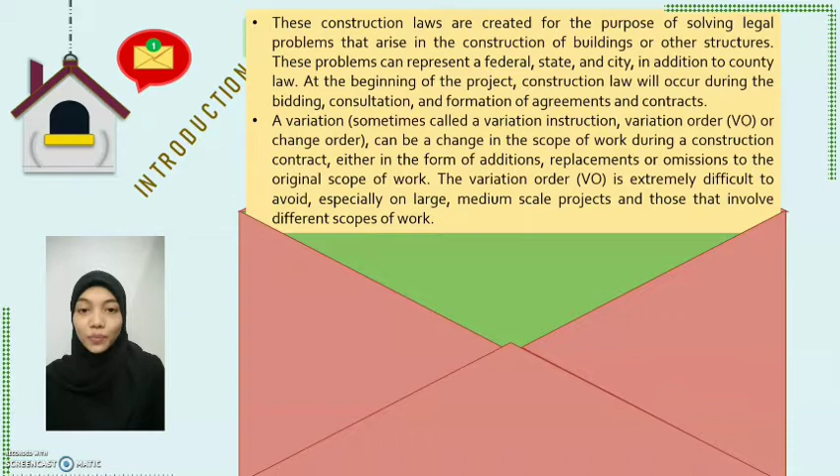Today I am going to present our group assignment related to the topic of variation order. Here I will explain a little about the definition of variation order, types of variation order, and issue of variation order. So firstly, the definition of variation order.

Variation order is a change in the scope of work in a construction contract in the form of addition, omission, or replacement of the original scope of work. Variation order is issued by the company to the contractor as an instruction to change the scope of contract work. Variation can also vary whether an increase or decrease in volume, type, quality, or execution of work schedule.

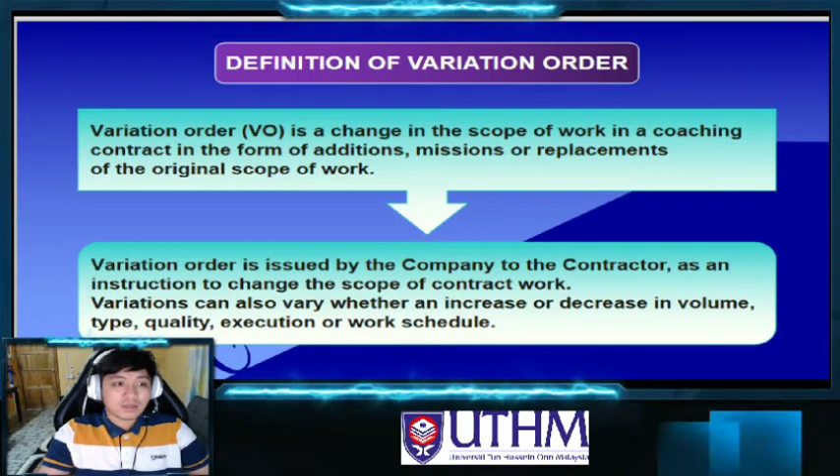So next we go to the types of variation order. Type of variation order, we have 5 types.

So first is change in the manner and method or material to be installed. This often happens in construction where the contract states the material used and the method of installation to be done. However, due to the variation order, this change occurs. This can affect the cost and time of a construction and affect the customer.

So next is different or unexpected site condition that were not imagined in the original contract price. This happens when a customer makes an appointment with a contractor based on a company website which specifies the price and fees to be set on the website. But it happens when the contract agreed between the contractor and customer is not in line with that on the website. This causes the customer to spend more.

So next is modification that changes the sequence of planned work as originally imagined. This change often occurs when an unexpected thing or problem occurs where the contractor has changed the previous planned sequence of work to a new sequence to avoid delay in the construction project.

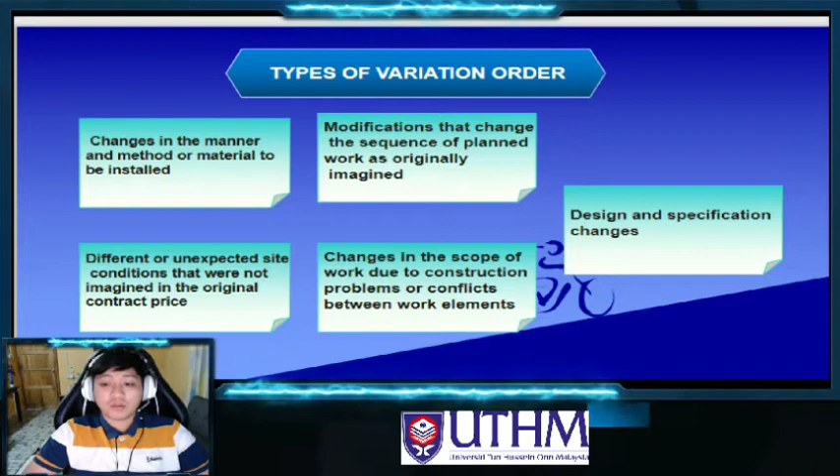So lastly is design and specification change. Change to plan and specification occurs when a customer wants to change the specification of a project, which will involve change to the plan that had been set by the contractor previously.

So lastly is issue of variation order. We have two issues. First is direct variation. A direct variation is issued once the owner specifically directs the contractor to create a modification.

So second is constructive variation. On the other hand, this occurs as a result of a non-owner directed event that implicitly necessitated a variation. That's all from me.

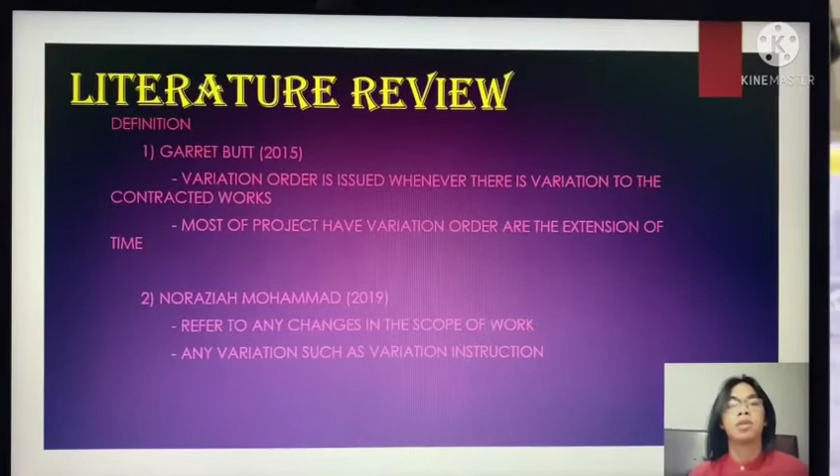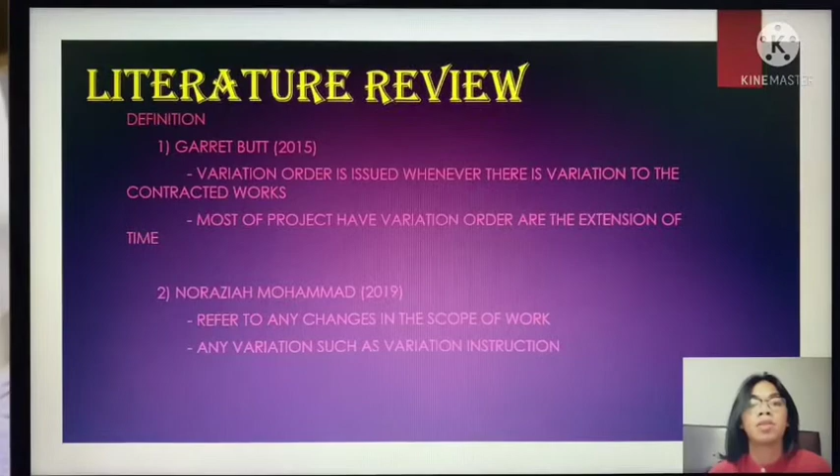First I will talk about the definition of variation order from the literature review. Garret Butt 2015 said that variation order is issued whenever there is variation to the contract works. Most project variation orders are the extension of time. Number 2 is Noraziah Mohammad 2019. She said that variation order refers to any change in the scope of work. Any variation, such as variation instruction, is a modified contract document.

Okay, next we will move to the types of variation order in construction. This type can be seen through the scope of work. There are five types that I stated in this slide, which is first, change in means and method or materials.

Number 2 is change in plan and specification. Number 3, correction made due to error or omission. Number 4, owner financial problems. Number 5, conflicts among contract documents. That's all from me.

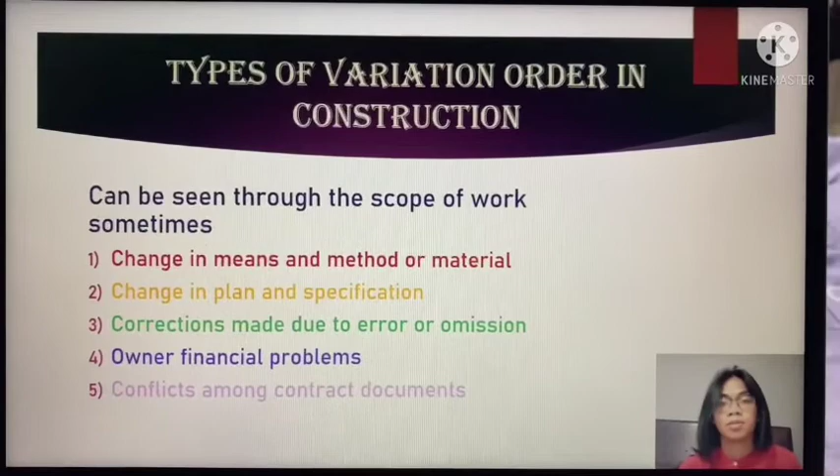Hi. In this section, I'll describe the clauses that belong to our group. This section sets out the contractor's, quantity surveyor's, and architect's obligations with respect to variation orders in PAM Contract 2006.

First, I'll describe the obligation of contractor and QS, the quantity surveyor. The architect or client may choose to modify certain components in the middle of construction or add an additional element to the structure. Whenever a change happens, based on clause 11.2, the contractor needs to carry out the works regularly and diligently according to the instructed architect. The role of the architect is included in the contract as the contractor is required to work in line with the architect.

Next, based on clause 11.5, the QS is on site for recording and measuring, and the contractor must provide the assistance needed to support the QS in conducting the activities. The contractor can also take notes and measurements on the site if he so needs and wants. In that scenario, the contractor should make a pledge to ensure the works run smoothly and swiftly when QS measures are implemented on site.

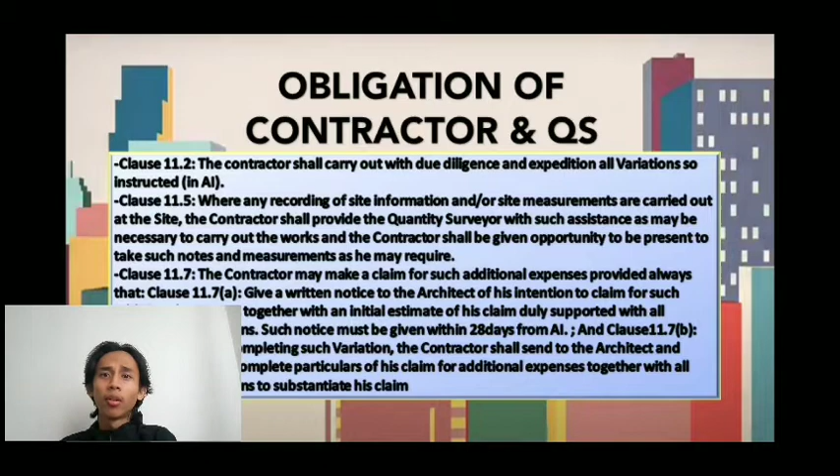If the contractor receives a variation order based on clause 11.7, the contractor may make a claim for the additional extra expenses, provided that from clause 11.7a, the contractor gives a written notice to the architect of the contractor's intention to make the claim of VO's expenses. The contractor needs to provide the necessary particulars of calculation of the works of the variation for the estimated amount of expenses needed.

Next, obligation of architect based on clause 11.4: when issuing a variation, the architect must organize the prime cost sums and the contract bill with the quantity surveyor in accordance with the amount owed by the variation. As a result of this modification, the client must pay more as the construction change increases the contract price. To reduce extra costs, variation must be avoided and deliberately addressed throughout the design process.

After giving the AI to the contractor, the architect is also advised to go for site inspection, to inspect the site for the variation works, whether it is done according to the drawing, and whether the variation is suitable and satisfied by the client. If the client is satisfied, the works may proceed by the contractor.

If not, the architect may issue another AI to change again, but keep in mind that there is a limit for variation in the works. In conclusion, the architect must fulfill his obligation in variation order to prevent violation of contract and end up with issues and conflicts. When the architect has done his duty wisely, there will be no or less offence by the contractor to deal with, or late recognition to the contractor, or any situations.

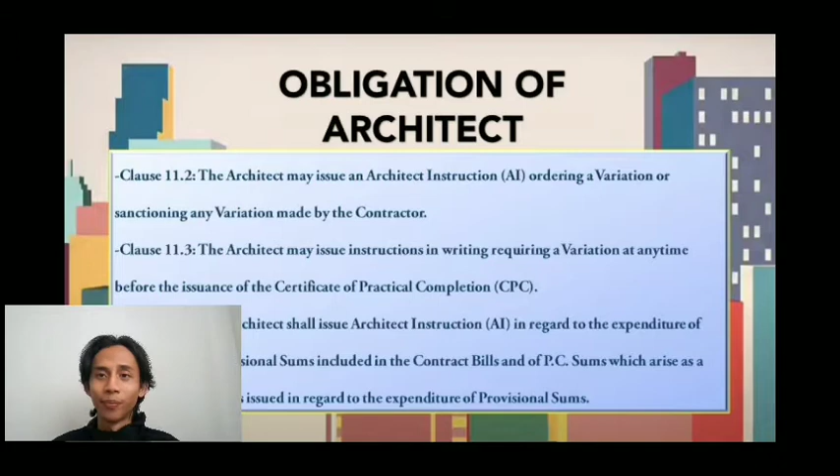Bismillahirrahmanirrahim. Now I will present case study 1, which is the maintenance of drainage system at Beach Camp Phase 2.

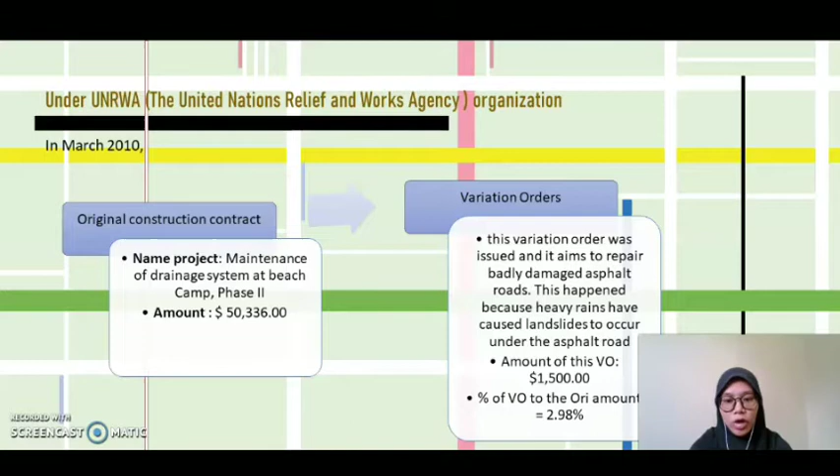This variation order is under UNRWA, the United Nations Relief and Works Agency organization. It happened in March 2010. The original construction contract was named Maintenance of Drainage System at Beach Camp Phase 2, with an amount of $50,336. After the variation order was issued, it aimed to repair badly damaged asphalt roads. This happened because heavy rains caused landslides to occur under the asphalt road. The amount of the variation order is $1,500, and the percent of the variation order to the original amount is 2.98%.

Case study 2 is the removal of debris from residential buildings in Gaza Strip. This is under the same concession, UNRWA organization, in December 2009. The original contract name is Removal of Debris from Residential Buildings in Gaza Strip, with an amount of $327,701. After the variation order, the purpose of the variation is to remove debris from additional residential buildings damaged by bombardment from December 2008 until January 2009. The amount of the variation order is $148,363, and the percent of the variation order from the original amount is 45.27%.

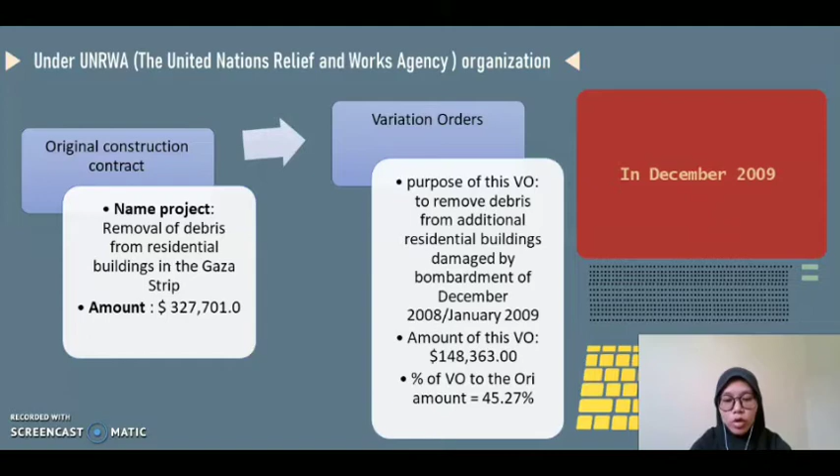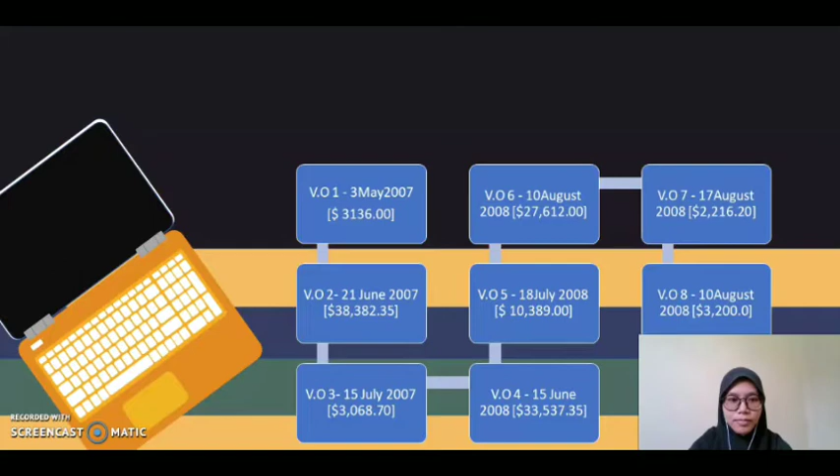Case study 3 is the construction of an emergency program office building at Gaza Field Office. This third case is also handled by the UNRWA construction project, and it is documented. The variation order happened 9 times: variation 1 on 3 May 2007, amounting to $3,136; variation 2 opened 21 June 2007; variation order 3 recorded on 15 July 2007, amounting to $3,068.70; and then variation orders 4, 5, 6, 7, 8, and variation order 9 recorded on 5 November 2008, which are the remaining works in the non-complete variation order.

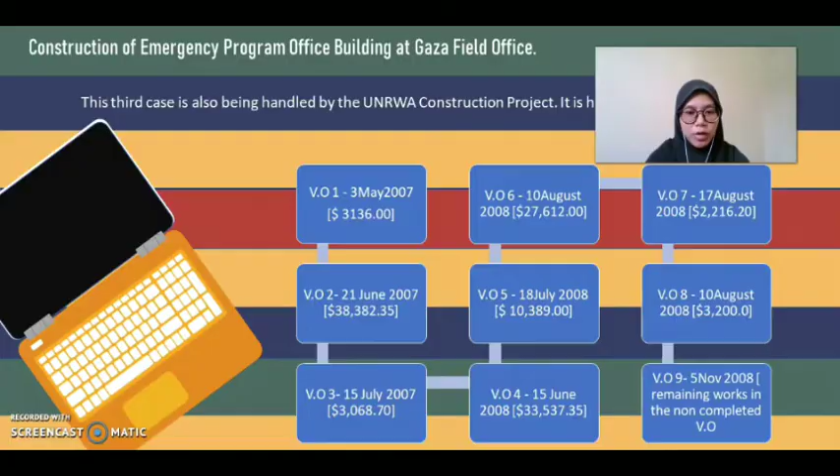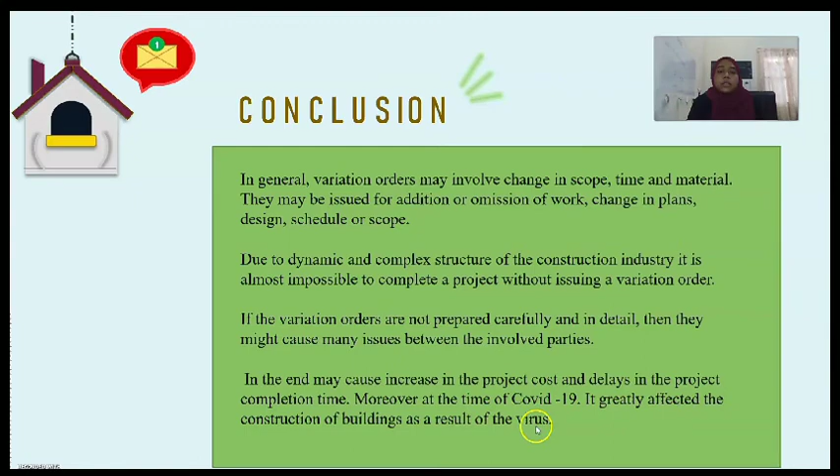In general, variation orders may involve change in scope, time, and material. They may be issued for addition or omission of work, change in plans, design, schedule, or scope. Due to the dynamic and complex structure of the construction industry, it is almost impossible to complete a project without issuing a variation order. If the variation orders are not prepared carefully and in detail, then they might cause many issues between the involved parties. In the end, this may cause an increase in the project cost and delays in the project completion time. Moreover, at the time of COVID-19, it greatly affected the construction of buildings as a result of the virus.